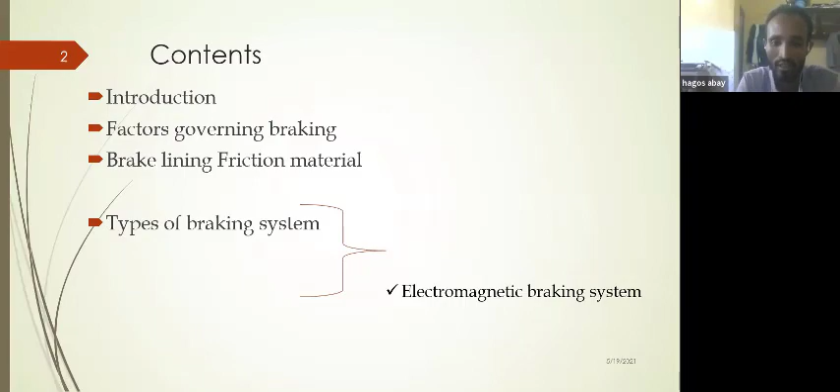There are some contents that I am going to present in this presentation. There are some introductory parts, factors governing braking, and also some brake lining materials and types of brake systems we will see in this session in detail.

As an introduction, it is obvious and commonly believed that the purpose of the brake system is to slow down or halt the motion of a vehicle. This is the principal thing for the brake system, where in principle, the friction against the road will make it stop the vehicle against motion. That means the brake will slow and stop the rotation of the wheels.

There are static friction and dynamic friction, or kinetic friction, which are available in the vehicle. Static friction is the friction between the road and the wheel, and kinetic friction is the friction between the moving parts when we apply a brake, either mechanically or hydraulically. The contact between the pad and the rotor will create kinetic friction. So this is what makes the vehicle stop during braking action.

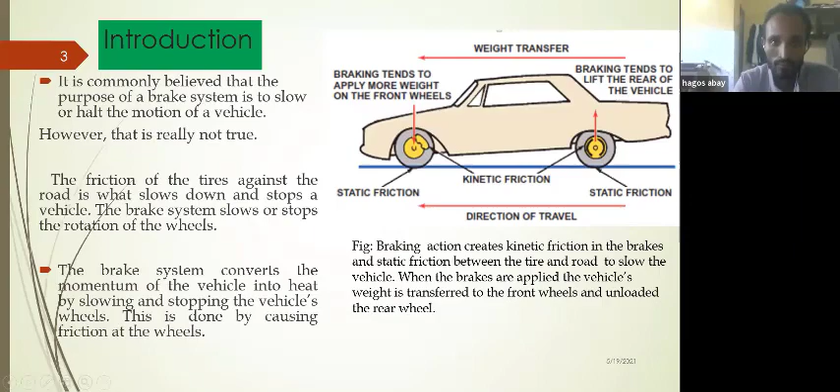There are some factors which govern braking. One is pressure, which is coming from the hydraulic system. The other is coefficient of friction, which represents the frictional relationship between the pads and rotor, or shoe and drums. The other is frictional contact surfaces - bigger brakes have higher braking than smaller brakes.

And the other thing is heat dissipation. During braking, there is high heat dissipation between the pads and the discs. This will prevent brake fade by selecting the proper and required brake lining materials.

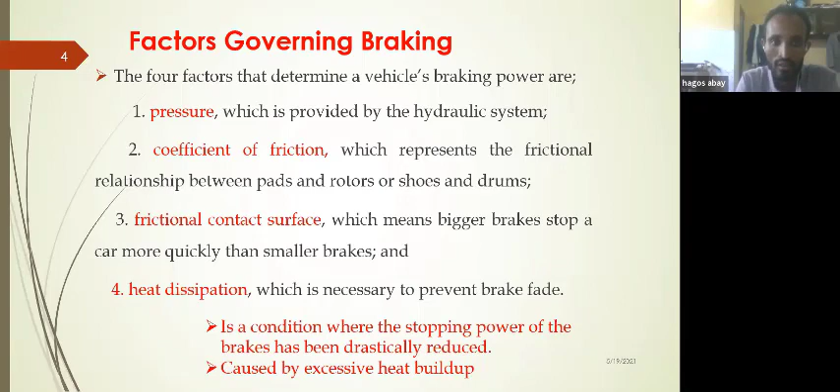So brake lining friction materials are made up of relatively soft and high heat resistant material with high coefficient of friction, and the lining is attached with a metal back, which is attached by rivet or high temperature adhesives.

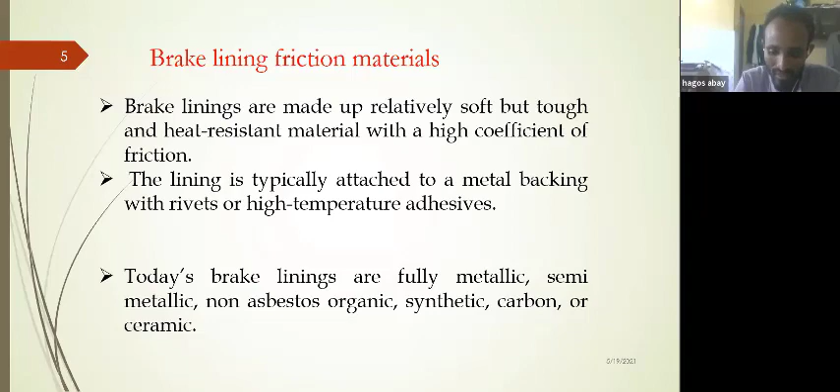In old trends, the brake lining was asbestos, but asbestos has its own disadvantage - it's toxic and hazardous. Due to that, researchers nowadays are trying to neglect this kind of brake lining material, and they are using fully metallic, semi-metallic, non-asbestos, synthetic, as well as ceramic materials nowadays.

So for types of brakes, there are different kinds available for vehicles. One is hydraulic brake, the other is mechanical brakes, found mostly in vehicles as handbrake or emergency brake, which is mechanically linked, and the other is drum brakes. This mechanical linkage may be found in drum brakes or disc brakes. Other power brakes are available for modern vehicles like air brakes - for example, heavy trucks and buses use this kind of air brakes. The other is vacuum assisted brakes, electric brakes, electromagnetic brakes. These electromagnetic brakes are found in modern vehicles and hybrid vehicles.

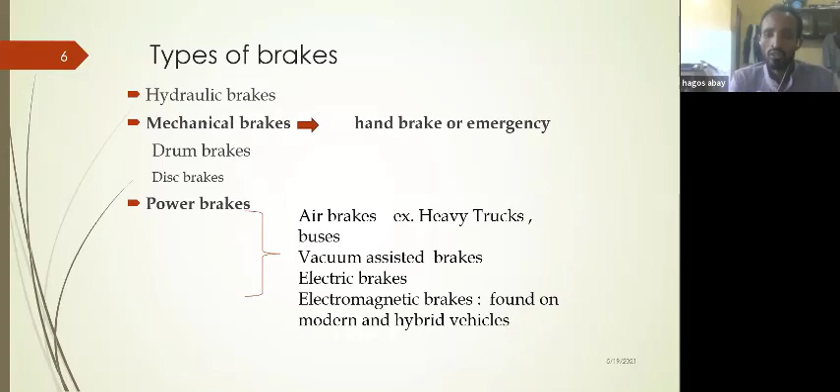So for the hydraulic brake system, this is done by the hydraulic fluid - some glycol ether or diethylene glycol - which pushes the force and transfers it to the wheels. The force will be generated by the brake pedal initially, and then it will be multiplied by a booster, and then the booster will give force to each front and rear wheel.

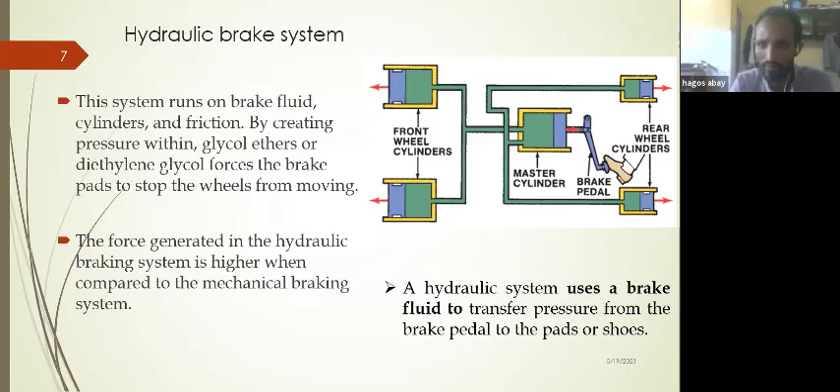So this is the overall schematic drawing of the hydraulic brake system, starting from the master cylinder. When a driver applies the brake pedal, the initial force is given to the master cylinder. Then the master cylinder applies the brake boosters - meaning in vacuum assisted boosters, there is an intake of air which comes or is integrated from the engine, whether it is driven by the engine or by a pump. So it gets vacuum creation between the diaphragm in the booster. This vacuum creation will create high force generation in order to send and multiply the force to each wheel by respective valves.

Once it is coming from the master cylinder - this master cylinder is of dual type, or so-called tandem type - it is combined with a metering valve and proportioning valve. This will be given to the front wheels and rear wheels, that means for the disc and drum brakes respectively.

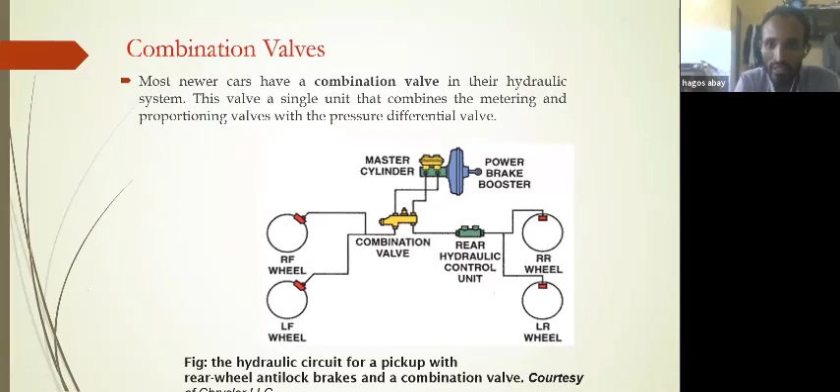When I say combination valve, this is recently integrated in newer cars with hydraulic systems. This combines the metering and proportioning valve with differential pressure valves. The metering valve will differentiate the hydraulic pressure.

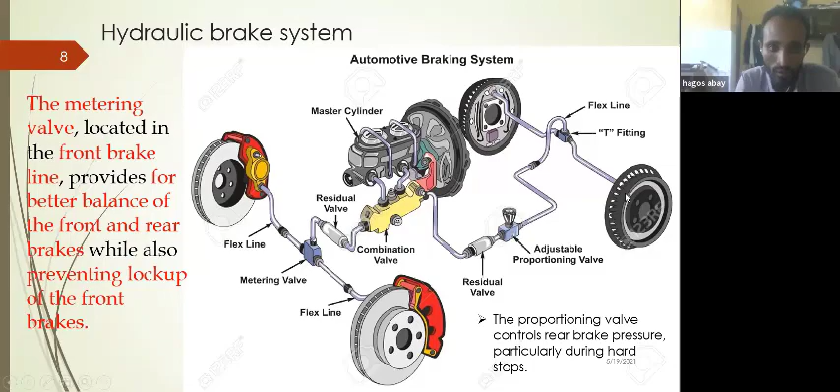This power brake is so-called brake booster or brake servo. When the driver depresses the brake pedal, force is generated.

Atmospheric air will initially enter this, and the push rod will push this spring, and there is a vacuum which comes from the engine. So there is pressure difference occurring inside the booster. That pressure difference will expand this diaphragm and let the hydraulic system allow to the master cylinder, multiplying the given pedal force in order to achieve high braking efficiency to the required disc brakes and drum brakes.

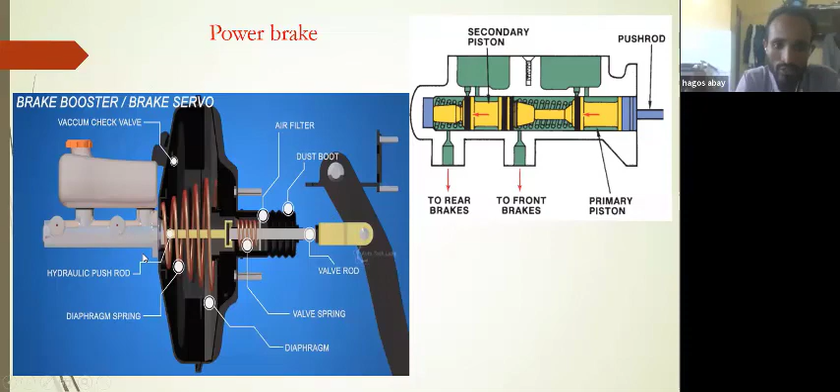So this is the system I explained already. In mechanical brakes, this is mostly found in handbrakes and emergency brakes, and also in disc brakes and drum brakes. This will be applied on the brake pedal and carried out by the drum or disc rotors.

Mechanical brakes are found in several old automobiles nowadays, and this is archaic due to being less effective. But in recent days, disc brakes are used in motorsports like racing cars with ventilated disc rotors for the case of ventilation or cooling systems.

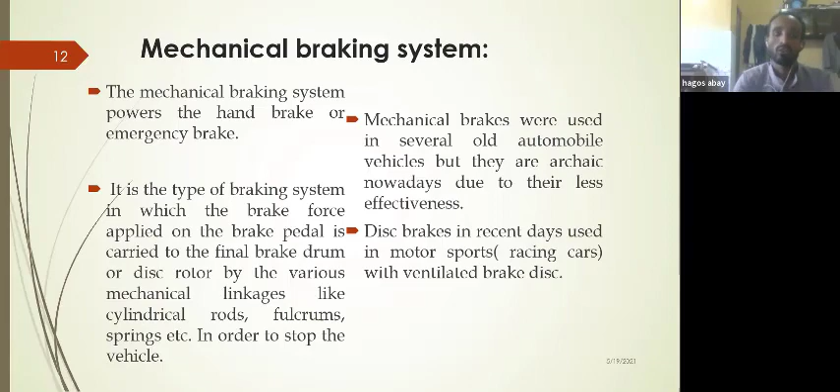Basically in drum brakes, there are mechanical linkages in case of hand brakes, and hydraulic which pushes the wheel cylinder in order to contact between the lining and the drum. This will make a contact between the brake lining and the drum, giving a braking system by the hydraulic.

When the friction lining and the drum make contact, the rotation of the wheel will be halted, and at that time the brake will be engaged.

In case of disc brakes, the fluid from the master cylinder comes to the wheel cylinders into the caliper, then it's pressed against the piston, so the piston squeezes two brake pads against the rotor, forcing it to slow or stop the motion of the vehicle.

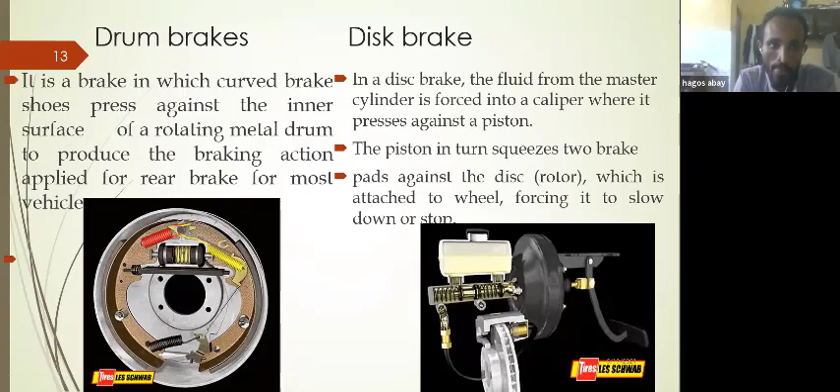In air brake systems, we need this due to large commercial vehicles, their size and the force required to get the required braking. Since the load and size of the vehicle vary and are much greater, it needs a high amount of force.

So to achieve that, we need air brake systems in order to travel high distances due to the length of the vehicle. But in hydraulic systems, it's enough due to its construction and dimensions. Hydraulic brakes are enough for light vehicles.

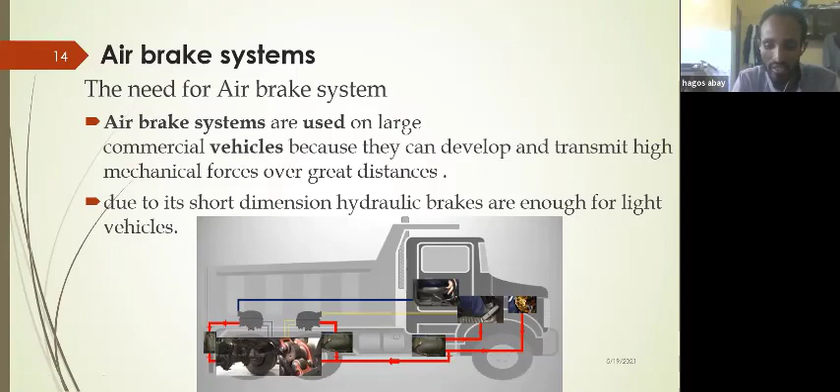Air brakes may be classed as single or dual circuit brake systems according to their construction. Because of poor safety characteristics, single circuit brake systems are no longer installed in commercial vehicles, because if some failure happens, it will cause some damage. So single circuit is no longer used.

Nowadays dual circuit is applicable in so many commercial vehicles and buses. Dual circuit brake systems are prescribed by law and subject to European standard. This is so-called EC or EU brake systems, which are used nowadays.

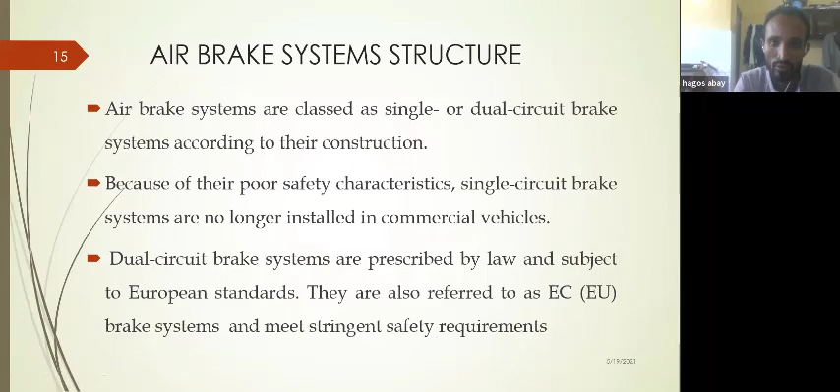As I told you, in a single circuit brake system, if some failure occurs, it doesn't have any backup system, so this is no longer usable. Dual circuit is used nowadays, since if one system fails, we can use the brake system by the secondary brake system.

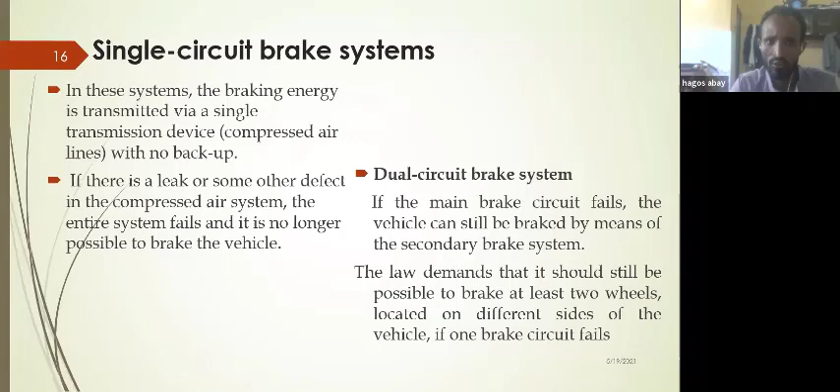Then it compresses and gives air to the pressure tanker. For the tankers, depending on the type of vehicle, there might be 4 air tankers, or 3 tankers, depending on the size of the vehicle.

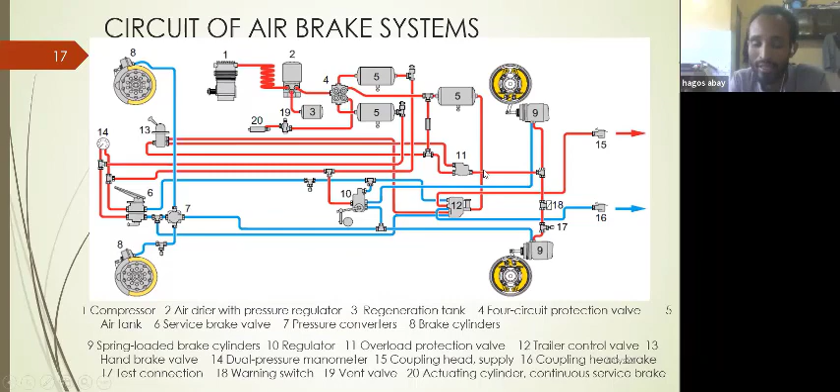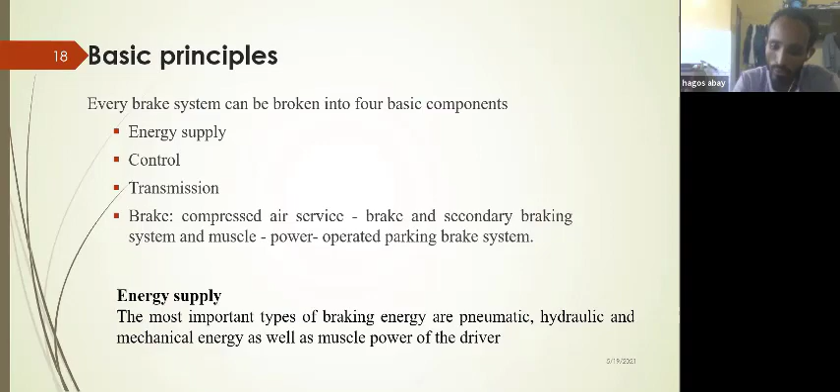There are some basic principles: energy supply, control system, transmission, and brakes. When I say energy supply, that's by using compressors, pneumatic, hydraulic, mechanical, even driver effort force are some energy supplies with their control systems. And brake systems include service brakes, secondary braking system, and the muscle power of the driver with parking brakes.

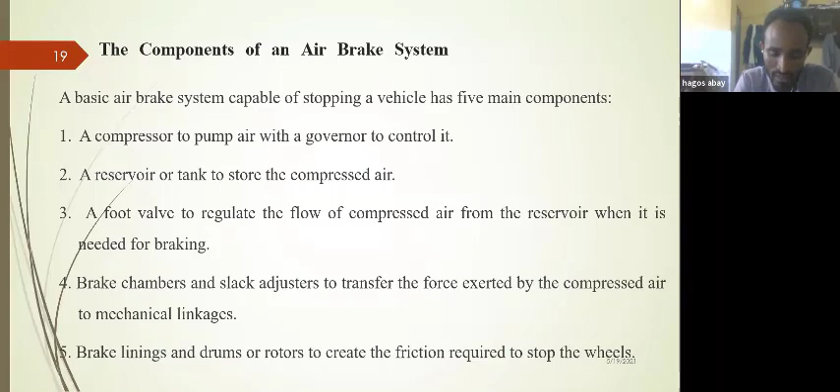So the basic components are the compressor, to pump the air, with a governor to control the air. The other is the reservoir tank, or storage compressed air tank, and foot valve. This foot valve regulates the flow of compressed air from the reservoir when needed for braking, and brake chambers with adjustable slack adjusters transfer the force to the mechanical linkage and brake linings. These are the air brake systems.

Highlighting the compressor, it works on the same principle as the engine. This compressor will compress the air, and during compression only it will compress and send it to the compressed air reservoirs. Once the pressure arrives at almost 8.5 bar, the governor will allow it to shut off from compressing and allow delivery to the compressed air reservoirs.

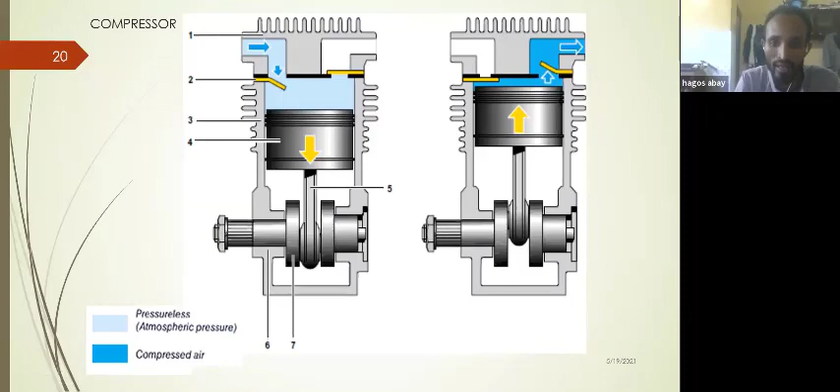The other is the service brake valve. Since the system already has compressed air from the compressor, in case of operating the brake system, the operator gives a depress on the pedal.

This valve receives the required amount of pressure from each compressed tanker. As you can see here, the upper part and lower part are synced, showing indicator numbers 11, 21, and 11. This 11 is for the foot brake valve, which is mostly used for front vehicles, and 12, 22, and 12 are there.

This is for the case of the hand brake valve. Each will have exhaust inlet and exhaust ports. The system which needs air brake specifically for hand brake and foot brake will be given from this service brake valve, so-called the commando valve, as it's ordinarily named. By using this, it will allow the specific type of brake for the required wheels—that might be front brake, intermediate, and rear brakes.

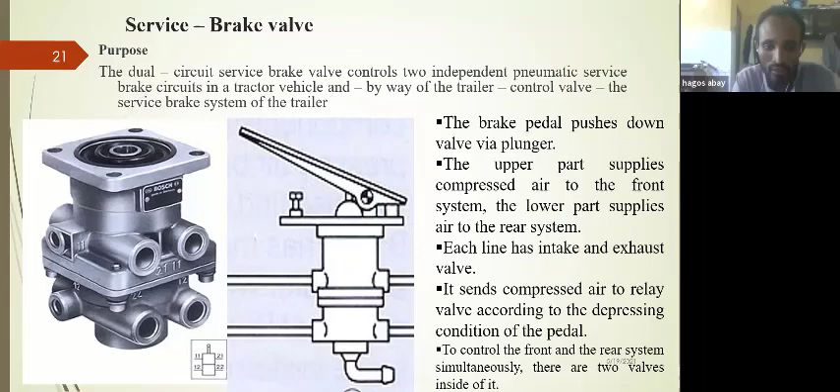So as you can see here, the driver is pressing this brake pedal, and when pressed, this brake pedal compresses these springs and allows the air which is coming from the compressed tank. By each system, it will enter this system and go to the front, and the other is from the rear air tank. It will enter and, based on the time of usage, go out through these relay valves.

So if we need the brake system for the rear, the air from the tank used for rear vehicles will enter this brake valve and go to the relay valve. This relay valve gives a quick response during braking action. This is sometimes called the quick release valve.

This quick release valve is mostly used for hand brakes, whereas the relay valve is used in foot brakes. When we look at modern vehicles like Volvo nowadays, we are using this kind of system.

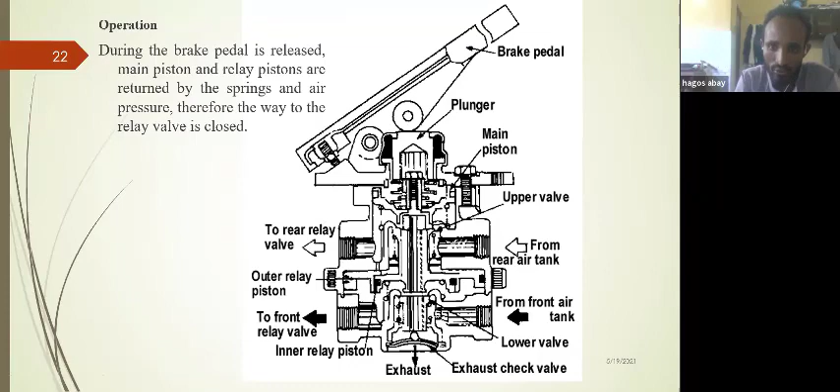So when we look at this relay valve, there is some signal coming from the driver, meaning air is coming. The supply air also comes from the reservoir tank. So once the driver pushes, the plunger will push the upper part of this relay valve downward.

Once it is pushed down, this spring will open, and the air from the reservoir will enter the system and go for delivery to the brake chambers. So during braking action, it will hold the brake system as long as the driver holds the brake.

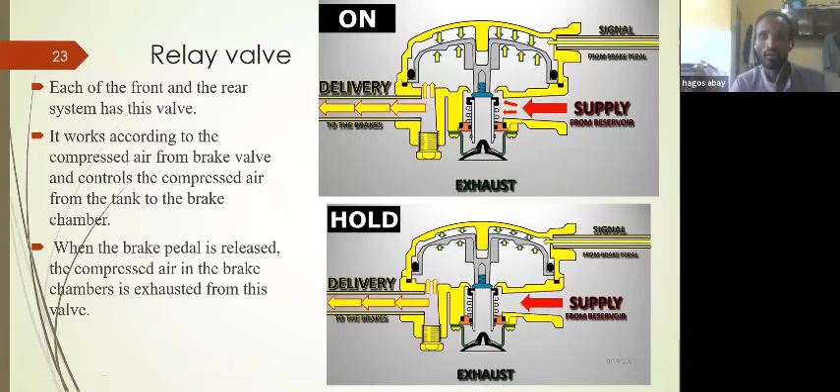The other parts are brake chambers and wheel brakes. These brake chambers are mechanical parts, meaning they convert the pneumatic power into mechanical linkages.

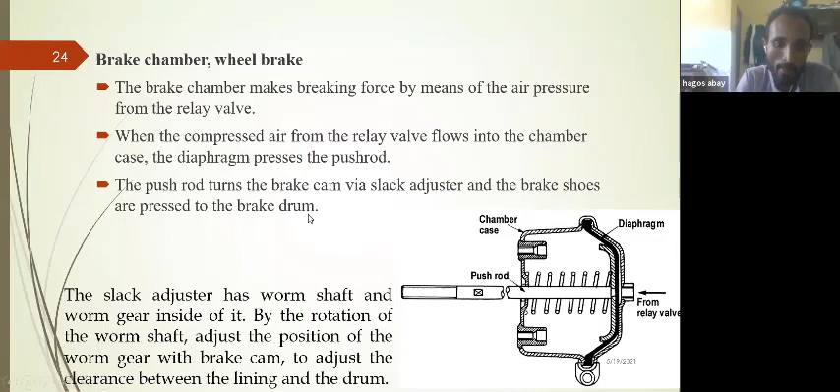As you can see here, there is a push rod coming from the brake chamber, and this is the slack adjuster. When air enters the brake chamber, based on the specific task of the air brake, it might push this side, and the slack adjuster will also push this S-cam, moving it up toward the drum.

Then there is contact between the lining and the drum. At that time, the braking action takes place, meaning there is no motion between the disc and the rotor. This is called braking action for commercial vehicles, which mostly use the S-cam type.

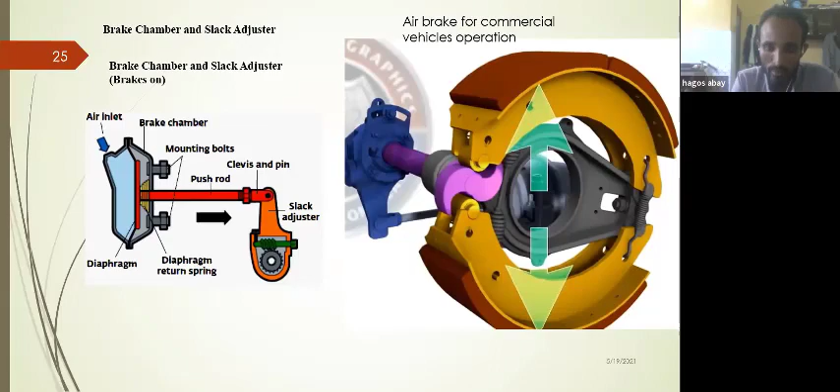The other is the electromagnetic braking system. This kind of brake system is found in modern and hybrid vehicles, just like trams and trains. Unlike other braking systems, this kind of braking system is quite fast and also cheap.

Its principle is electromagnetic action, which is frictionless because there is no direct contact between the moving parts. This increases the life of the brakes with greater reliability.

There are some advantages to using this electromagnetic braking system. It is fast and cheap, and there is no maintenance cost since we don't pay for replacing components in these electromagnetic braking systems.

Nowadays they are also using the magnetic braking system, which is recent in modern vehicles.

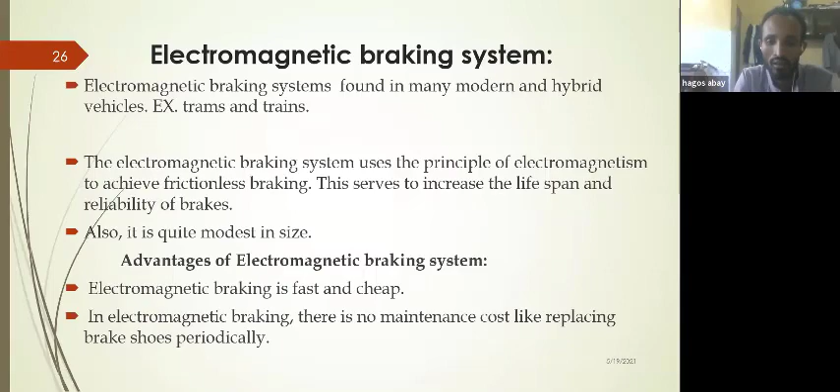The other is the anti-lock braking system. As the name indicates, it is the anti-lock braking system. This was developed to assist the driver's braking action by preventing the tire from sliding and keeping it rotating slowly to allow steering.

This system has a safety feature that allows a motor vehicle to maintain tractive contact with the road surface according to the driver's inputs while braking. It prevents the wheel from locking up and avoids uncontrolled skidding during emergency braking, improving vehicle control and decreasing stopping distance.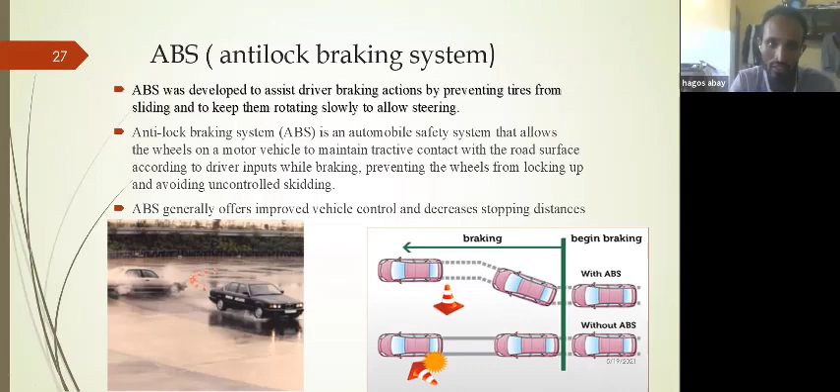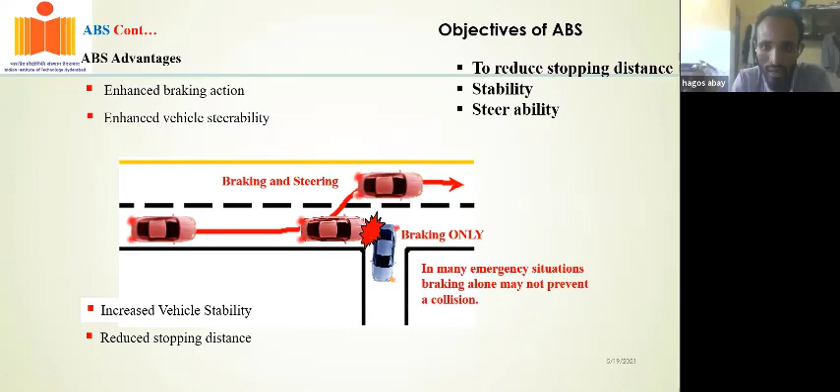The other advantage is that it enhances braking action, vehicle stability, and stopping distance. As you can see from this picture, only braking is not enough to avoid collision during an accident, so the steering system also acts as a braking system. There are some components that are integratively used in this ABS system nowadays.

The first one is ECU. This ECU receives signals from sensors in the circuit and controls the brake pressure at the road wheels according to the data which is analyzed. So this assists the vehicle operator to prevent wheel lockup by regulating the wheel slip. So the vehicle which has higher grip will prevent wheel lockup.

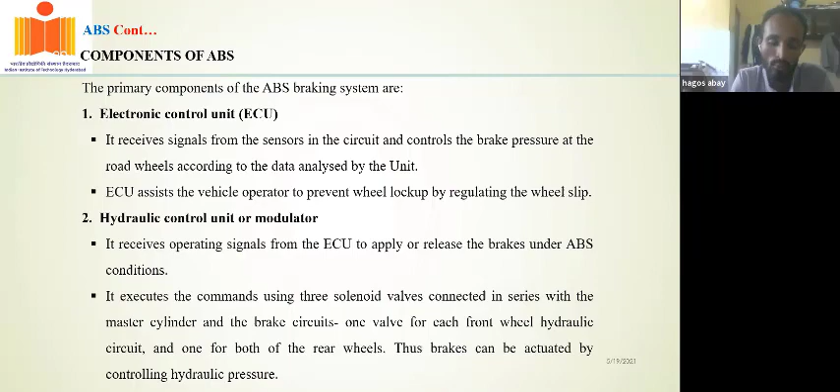By using this pressure differentiating to the rear wheels through a distributing mechanism. The other is the hydraulic control unit or modulator. This will receive signal from ECU to apply or release the brake under ABS conditions. In case the vehicle is in wheel lockup, the ECU will send a signal to this hydraulic control module, which will block the system for the master cylinder, so that the ECU will send a pressure in order to have velocity and high ground or contact pressure. That means it will increase the grip between the surface and the wheel, so that the vehicle will come up or be relieved from locking.

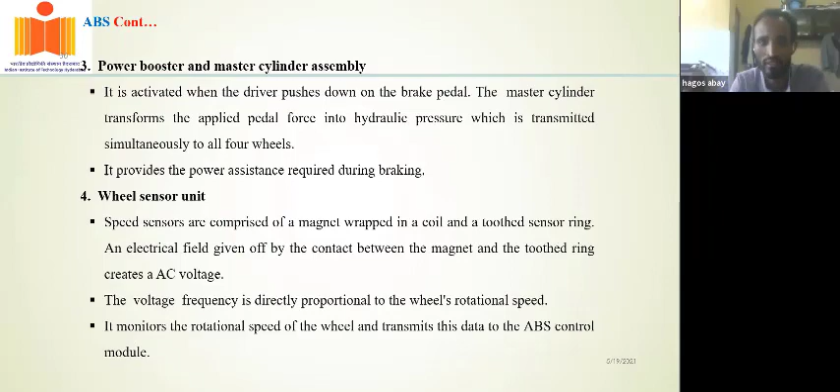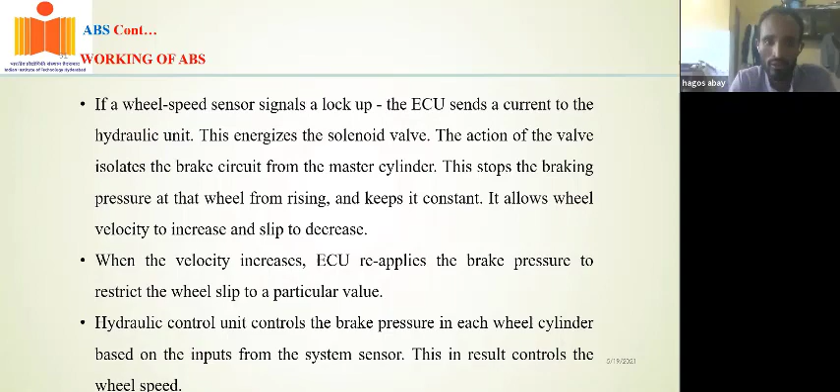The other is the booster. This will be activated by the driver on the brake pedal, and sometimes they are integrated between the master cylinder and the other system. There is electronic brake distribution during braking action in ABS systems.

As I told you, for a vehicle during emergency braking, if we apply it, there will be a yaw rate of the vehicle which increases the slip. So if the slip is increasing, there is an uncontrolled movement.

Sir, you are muted. Sir, now it's audible, is it audible now? No, sir. One minute, sir, one minute. Sir, now is it... again share the screen? Not shared. Now, sir, now screen is visible, sir? Yes, sir, slide is visible. Okay, okay, thank you, sorry for the disturbance.

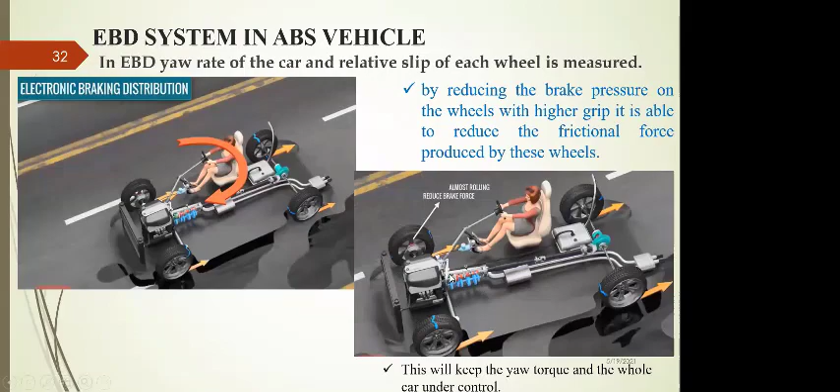In the wheel there is a wheel speed sensor. According to the rotation of the wheel, it provides the required pressure to activate the braking system for specified wheels. In this system, there are 1 channel, 3 channel, and 4 channel systems in the ABS system.

When you say what? Hagos, please turn on your video, Hagos. Your video. Okay.

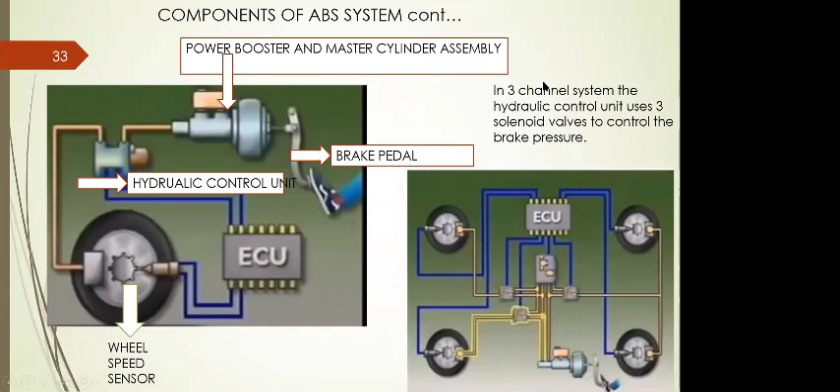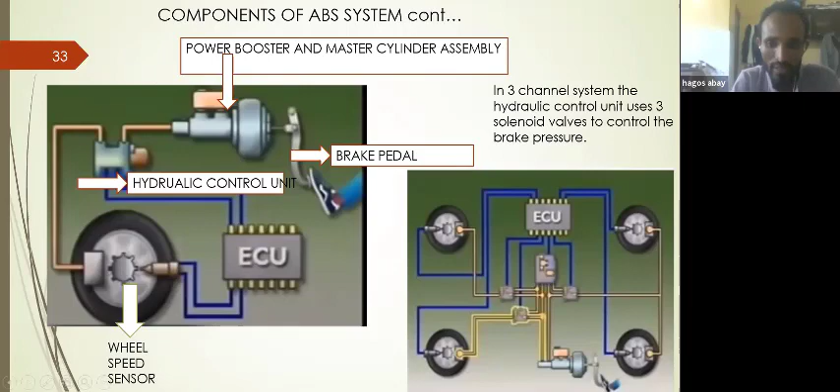Now, when I say 3 channel, there are three channel systems with 3 control solenoid valves to control brake pressures. One channel is used commonly for the rear wheel anti-lock system with ECU, and the 3 channel system, as I told you, is used for the rear wheels together and front wheels independently. They use 3 speed sensors and 1 control module.

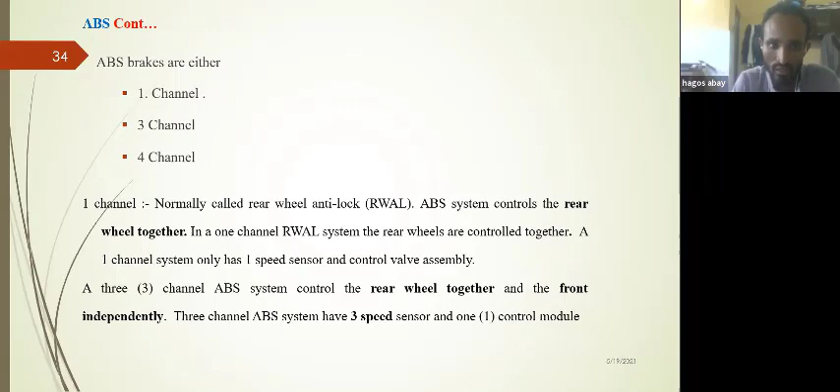So this is a bit about the brake system nowadays, from old to modern vehicles, that I have already presented. Thank you, I have finished my session.